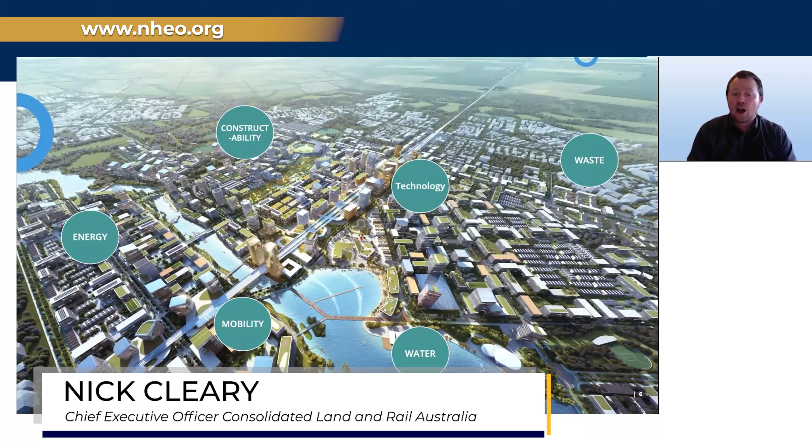CLARA realized that to build a city at scale, you have to overcome challenges in six core elements. These include water, waste, energy, mobility, constructability, and big data or technology. Getting these core elements right will enable sustainable, livable, and connected cities to be built that not only provide a place for people to live, but just as importantly, do so in a way that enhances and doesn't detract from their dreams of what life can be.

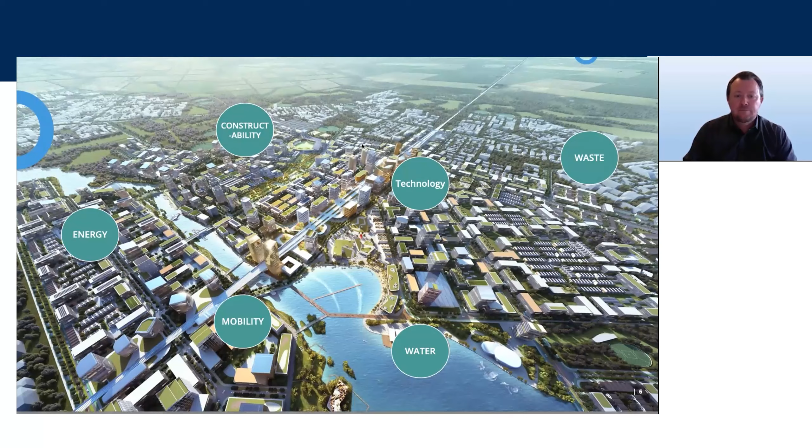Water is life. Without it, we perish. Australia is the driest continent on Earth, and yet we recycle only 4% of our water. This contrasts with countries including Kuwait at 39%, Singapore at 41%, and Israel at 44%.

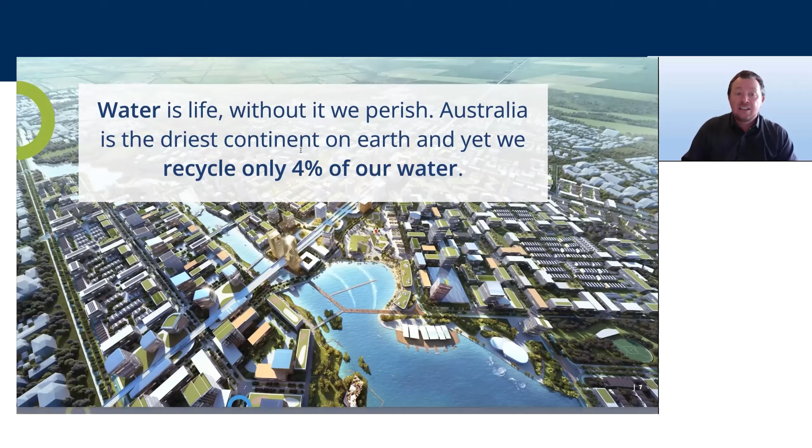CLARA cities will be built on a platform that enables and encourages the recycling of water. In stage 1, water will be recycled at 20%, lifting to 40% by year 17. All water required for the city will be captured and stored from the land parcel the city site sits upon, stored in large-scale reservoirs or underground aquifer regeneration, with minimization of evaporation and leaching a high priority.

Double piping and treatment of grey water will be a requirement, established as a first principle in the first stages of construction. By acting early and regulating this purpose, CLARA can also ensure a cost reduction in installing these systems, costs that can be extreme or entirely unachievable when you try to retrofit into an existing urban environment. The use of surface storage can also be put to great use as a host for floating solar or recreation purposes for the community.

But none of our infrastructure should have but one use.

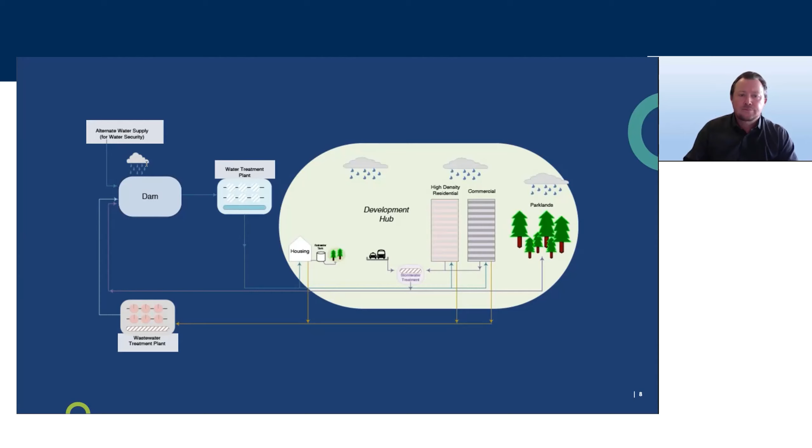Waste is a massive problem around the world right now. We see it also as a huge opportunity, an opportunity to use that waste to create energy through energy-from-waste projects. Also an opportunity that, if planned for from the beginning of construction, can host an at-scale vacuum waste system citywide. Vacuum waste can minimize traditional garbage truck movements, encourage resident recycling, and measure and accurately and appropriately charge for or provide an incentive based on the total volume of waste per home.

A vacuum waste system and energy-from-waste facility will remove the need for landfill sites, which create dangerous and extreme methane problems for existing communities right around the world right now.

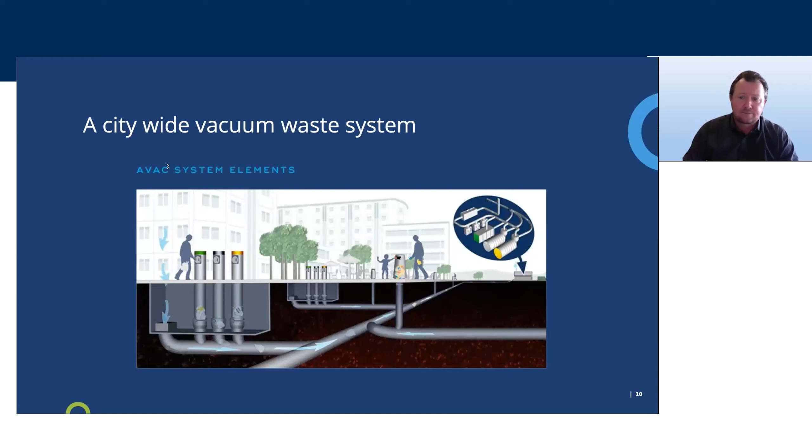Renewable energy will be at the heart of our sustainability plan. Using large-scale solar farms, including the potential for floating solar on our water storage facility, will form the predominant electricity supply generation capability of a new CLARA city.

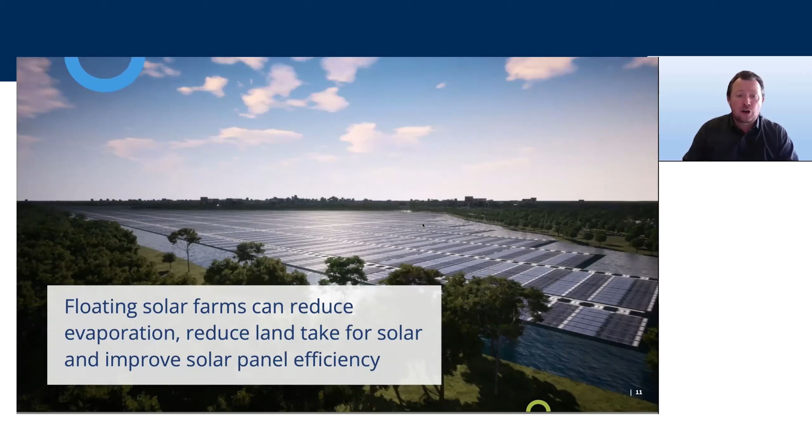The use of green hydrogen, using solar to power electrolyzers, will supply household gas, district-wide heating and energy storage, working hand in hand with a large-scale battery energy storage system, such as lithium-ion batteries.

Therefore, connection to the traditional grid will not be necessary within a CLARA city. This will have the impact of not only being good for the environment, but will also reduce the cost of supplying baseload power to each residential home and commercial or industrial facility. Being good for the planet and customers' hip pocket is good for livable communities.

Energy from waste will also play an active and vital role in our energy supply options, and will combine to deliver a baseload energy system that delivers green energy at the lowest possible cost, much lower than aging fossil fuel infrastructure could ever hope to deliver.

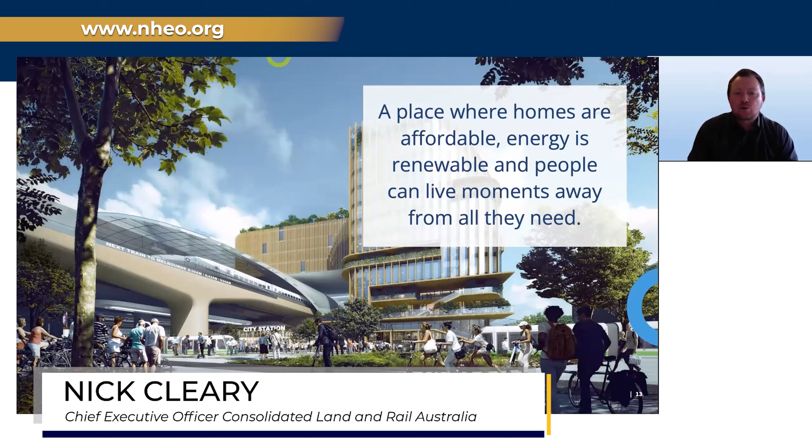Mobility is crucial if we are to create a sustainable and connected community. This policy will be a catalyst for people to live within 30 minutes of a capital city, but in an area where homes are affordable, energy is renewable, and people can live within moments of all they need. Mobility within a CLARA city will be planned around optimizing mass transit and minimizing the need for private vehicle ownership.

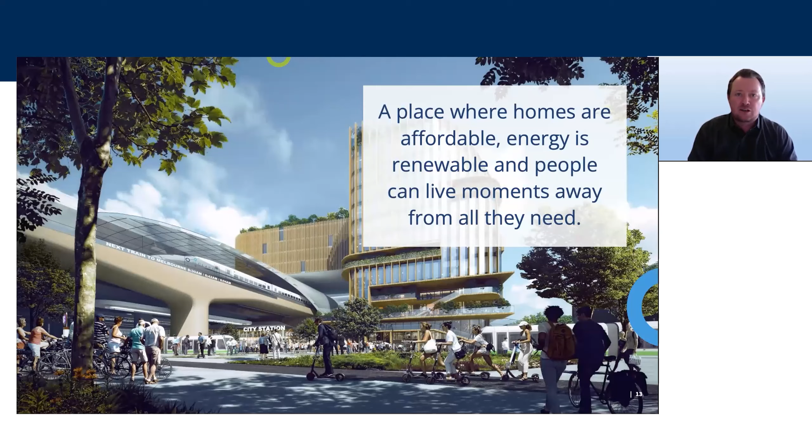Walkability will be core to the layout and planned mixed-use design of the neighborhoods and the city centre. Mass transit like trackless trams will be designed and implemented from day one. The lower capital cost of using trackless trams provides flexibility on rollout and on routes.

Mobility as a Service, or MaaS, will be implemented as a CLARA city standard. MaaS has the potential to provide households with a private vehicle with only minutes of requesting. Similar to Uber mixed with Netflix, MaaS can be provided at a fraction of household expense that a private vehicle would cost. MaaS will change the way city centres look, with far fewer actual cars existing within city limits.

In Australia, the average household has 1.5 cars. So for a city of 180,000 dwellings, a CLARA city, this equates to approximately 270,000 cars. These cars spend an average of 96% of their time parked in a garage or on the street.

Under a MaaS model, the total number of vehicles required to service a community of 400,000 people could be as low as 30,000, a substantial difference to the on-site presence of motor vehicles. Reducing the average household expense by up to $25,000 per annum is an added advantage.

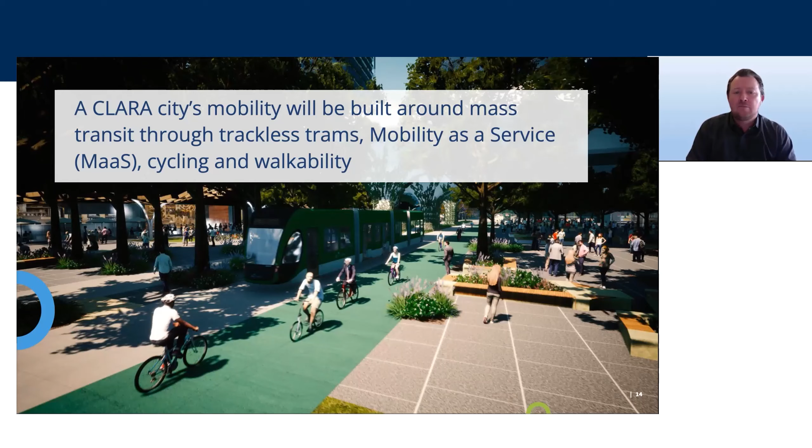In a connected city, mobility plays a monumental role. Getting this right will help to achieve our vision of building livable, sustainable, and connected cities in a CLARA city. Having systems like MaaS changes how we design, plan, and build dwellings in a CLARA city.

Constructability is core to the sustainable aspirations we have in building new CLARA cities. The use of renewable energy, district-wide heating, vacuum waste, and mobility as a service all enhance our ability to rethink the way we build homes in a CLARA city.

No longer requiring garage space with access to street fronts changes the design and the layout of most dwellings. Centralised heating and cooling infrastructure will change the on-site requirements of a house, reducing the impacts these things often have, including increased cost, reduced amenity, spoiling aesthetics, diminishing livability, and inhibiting the creation of livable and connected communities.

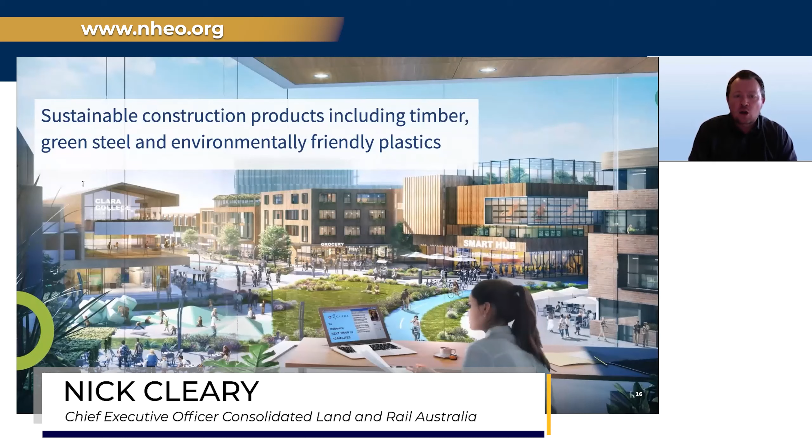Sustainable construction products, including timber, green steel, and environmentally friendly plastics, can change the way we see the construction of dwellings. Prefabrication may enable faster construction timeframes, higher quality control, lower maintenance costs, and sustainability at scale. Using timber products, for example, may limit the use of steel and other heavy fossil fuel consumption products.

Better by design principles will ensure that whilst achieving better sustainability and better connectedness, we also achieve better livability, both inside and outside the home.

Changing what needs to be included will ensure the thought going into the interaction between the interior of a home and with open space, public open space, will ensure the livability, sustainability, and efficiency of homes built in a CLARA city are second to none.

Homes that are cheaper to build, cheaper to maintain, and cheaper to run, whilst being better for the environment, will ensure consumers' appetite is maintained and increased with the build out of any CLARA city.

Building with growth in mind and a plan for the future will ensure homes within a CLARA city are not left with inadequate or redundant facilities, as seen in many smart city projects around the world.

CLARA cities are built around people, ensuring that when decisions are made, they are made using a driving mentality of how does this help people live in a CLARA city.

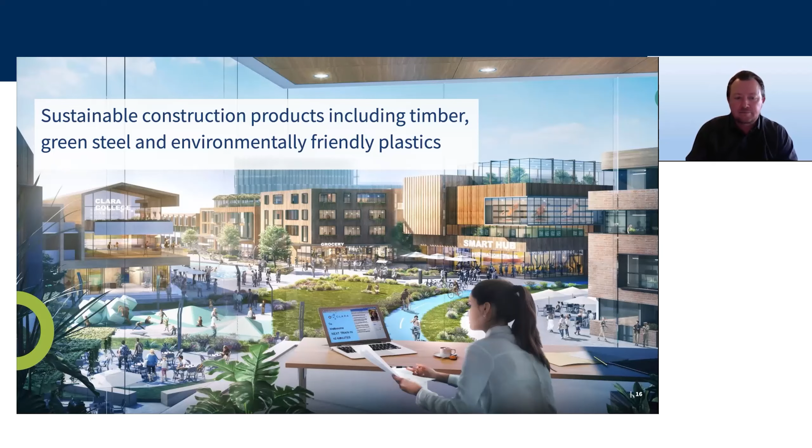Data and technology is so essential to enable CLARA cities to be all they can be. It's an essential underlying philosophy. Big data or technology must be in place to enhance people's lives. This technology must never invade a person's privacy, but it should rather enhance their life.

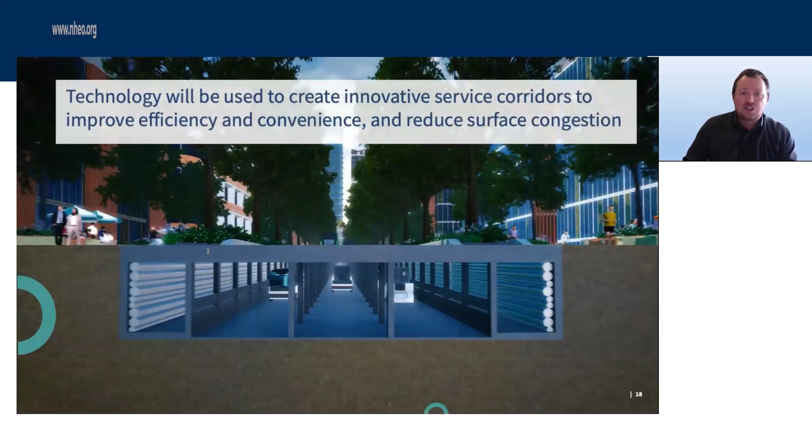In a CLARA city, technology and artificial intelligence will be used to enable a mobility as a service transit system. It will provide smart meters for community members' power and water use, reducing those uses. Technology will be used to create innovative service corridors to improve efficiency and convenience and reduce surface congestion.

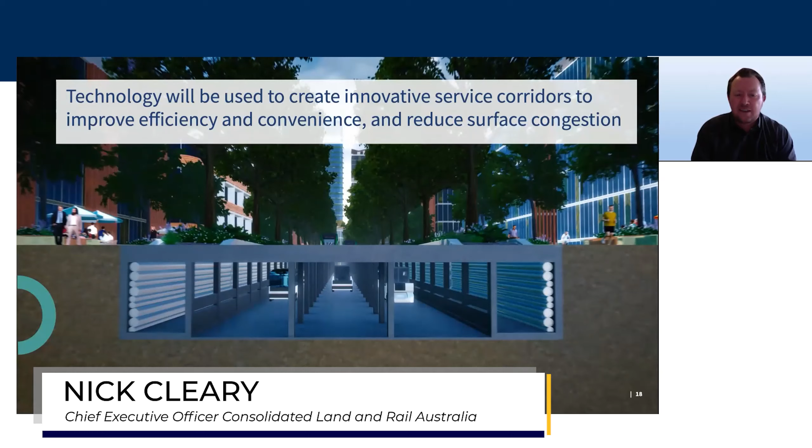It will provide accurate waste disposal data to provide an incentive scheme based on the household's ability to reduce waste. Technology will encourage the use of active transport by making it safer, more convenient mapping, identification of shared vehicles, and real-time savings and health benefits.

Technology within a CLARA city will enable advanced medical diagnosis, both on-site and remote. Data will enable new healthcare recovery options, reducing cost and reducing recovery timeframes.

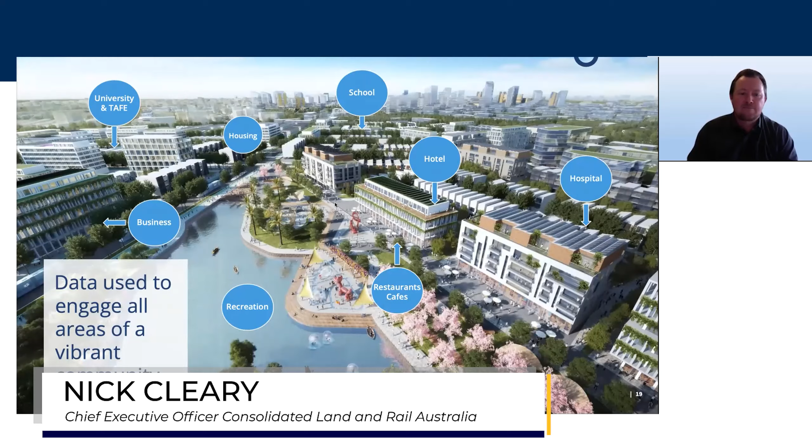Education will be open to all. Technology and data will enable community members to live, work, learn, and play from a CLARA city. The ability to sit in very real time at universities around the world will be available to all wanting students in a CLARA city. Technology will link people in a technological and a physical way with each other, achieving a vision of a connected city.

Data and technology will encourage businesses to locate within a CLARA city. Technology combined with transport options and access to education will ensure talent is found within a CLARA city.

CLARA has a vision to build the world's most livable, sustainable, and connected cities. And as you've no doubt learned from this brief talk, we are well placed to achieve this in the coming decade. I was asked to talk to you today with a view to help inspire the future of sustainable construction.

Well, I hope I've been able to highlight what we're doing to emphasize that in order to create a sustainable world, we must first learn to envision, design, plan, and construct sustainable places for people to live, work, learn, and play. Thank you so much for your time and have a great rest of the conference.